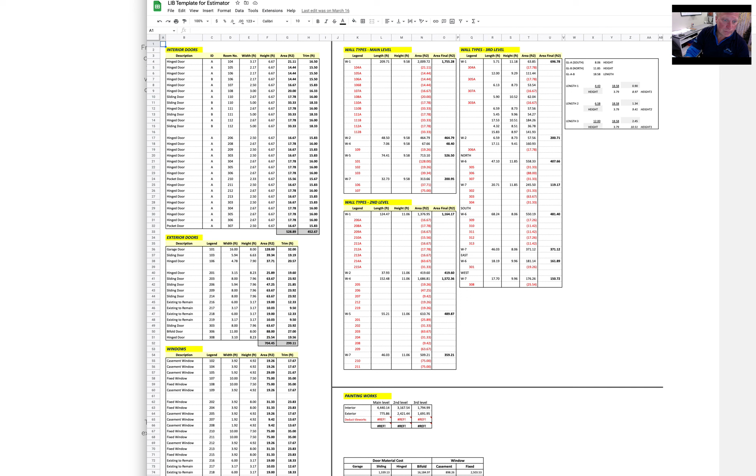We can do a break off that has all of the different estimates on size, space, units, volume. Then we get into walls, doors, amounts of units. Then we get into the line item budget. And this could be whichever project. This was an old project we did in Snowmass. You have the preliminary stuff that doesn't have anything to do with the site, but has everything to do with documentation and overhead. Then you have demolition, excavation, site work, landscaping, and so on. And this can be outlined in many different fashions. We ended up outlining it with 3,600 line items.

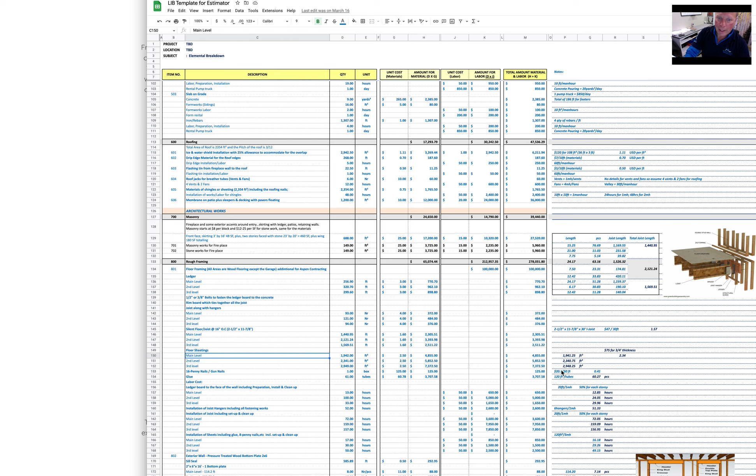For instance, here's rough framing. It's all the way down here at line item 800. Daryl, or whoever was working at the time, put some information over here in the notes with regards to what things cost, different dimensional planes, different costs of lumber, different takeoffs that have information with regards to whatever that line item was or is, and then going all the way through. So it has the quantity, unit cost, amount of the material, unit cost, amount for labor, and then total amount for both combined. And then to go all the way down, you'd have your total, right? So it's all broken down, excellent documentation. Daryl did an incredible job on this.

And then of course you could do an active budget, which we're doing right now on many projects that we do. We do an actual budget that we're actively updating. I'm actively updating daily or weekly. And then you have your subcontractor draw request. This actually documents the complete total for each line item, and then what's been billed out. So you get your percentage of completion as you go.

It's an active, or almost real-time, relation to what's going on. So that's everything with regards to the documentation and how we use the documentation.

Now let's get into something real simple. So we get into looking for estimates. Now, when we're looking for estimates, we first need to give them a scope of work. So here it is. I have Basalt, I have framing a loft, set rim and run 2x12 cut on top of walls with a cantilevered overhang that includes a 130-inch stair, 13 risers at 7 3/4 inch with a 10-inch tread. So this is framing a loft and a little stair, right? Onto a platform. Okay, so with that information, do I have enough info to give a bid?

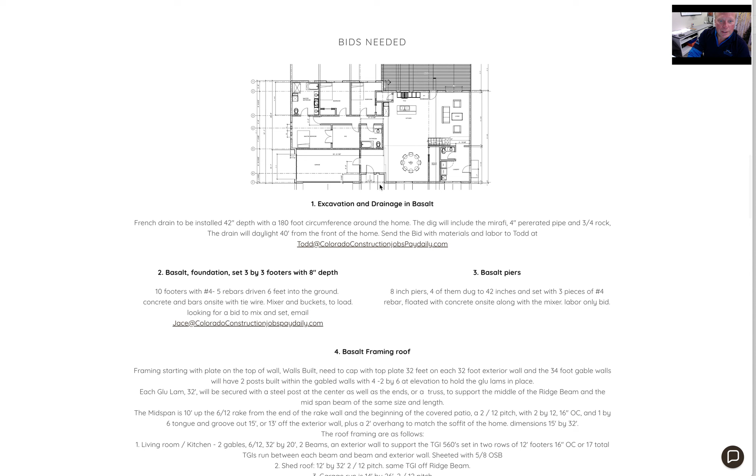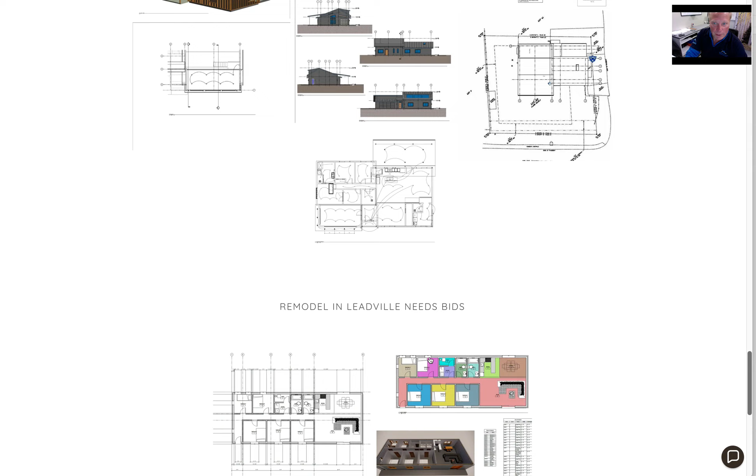Well, here's the layout. I don't have the loft there. Let me go down and see if it's down here. And there it is. So I have the loft outlined. Remodel in Leadville. There's the loft right there. So this is the loft. And there's the stair. So I know it's 16 feet by 32 feet, right? Because it has the 8 foot, 8 foot, and 16 foot, 32 foot. So how hard would that be to bid?

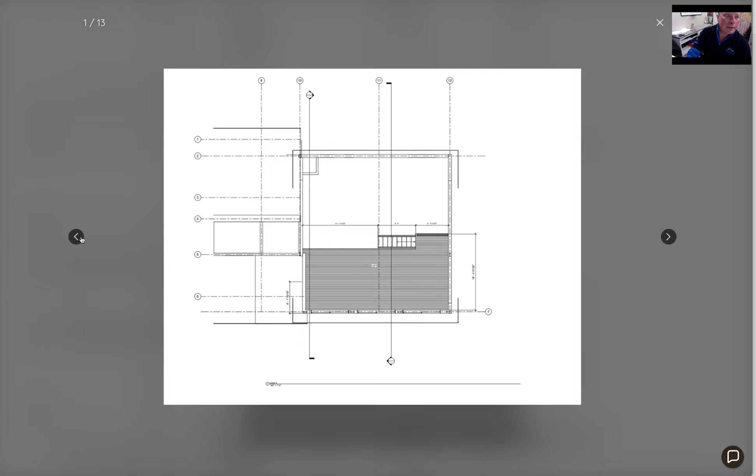Now let's go back up here. So I can go through there with electrical. And let's go back here and have framing. Framing a loft. Set the rim, okay. Run 2x12 on top of the walls with a cantilevered overhang. Rough sawn 6x12, okay. So someone could have given that bid real easy. It would have said, framing a loft, and then I would have had scope of work.

Install 2x12, rough cut, 16-inch on center. There would have been like 20, I think 25 of them. So that's $2,500, $100 to set each one. So that would have been $2,500. And then cantilevered overhang, 130-inch stair. The stair would have been $3,500. Standard price that I do for stairs. Cut from rough sawn.

Now to get a bid, for us, it's real easy. So we can go in here and do, let's say, Basalt foundation, 3x3 footers. You need 10 footers with number 4 and 5 rebar driven 6 feet into the ground. Mixer buckets load. Okay, so 3x3 footers, that's 9 square feet per footer, right? There's 10 of them. So it's a total of 90 square feet.

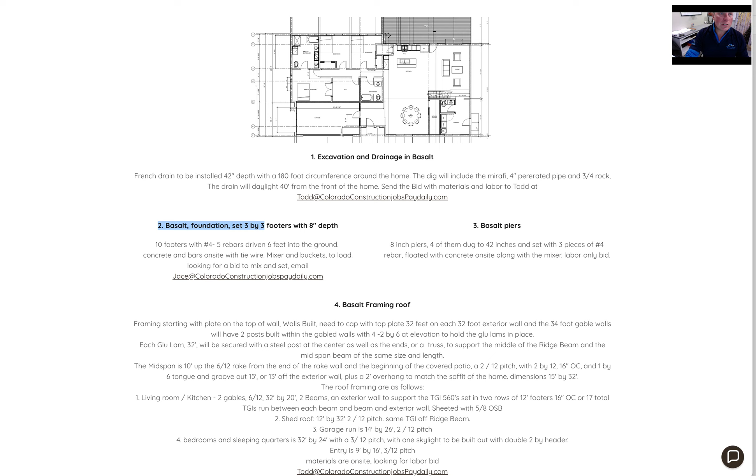Now, Fixr is a great place to find bids or estimates. Architectural, yes. Wood for the entire house. Continue. Put that down there. We're kind of looking at home or residence. Do I know? Okay, so that's Fixr. Let's see if they'll give us any numbers. Main. Alright, there you go. I can go there. Searching for pros in Carbondale, comparing quotes. Okay, so it's trying to find quotes.

Then you can go into here and go into how much does it cost to build a footer and pour concrete footers in Colorado. Okay, let's see what they come up with. So then you can come on down here. So here you go. Here is an average cost and prices. Cost of concrete in Colorado is $6.25 a square foot. That's 4-inch reinforced. We're doing a foundation, so that's double or triple that. That would be $12.50 to $18.75, right? That's the cost per square foot.

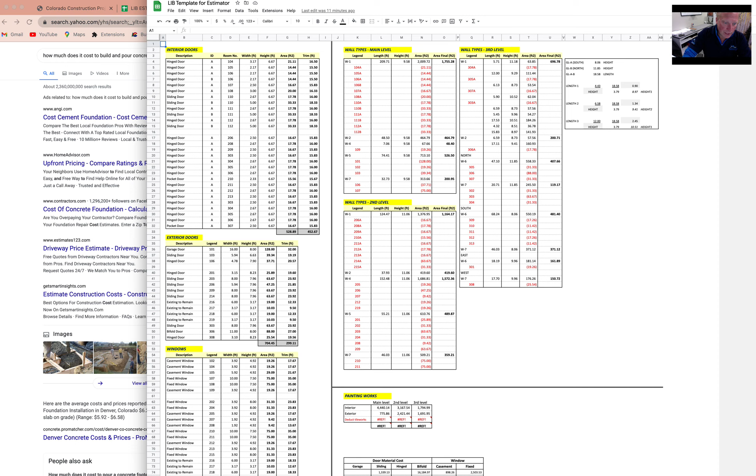You know now you went through what I'm sharing with you, this estimating folder. It has the renovation template, which is this template here, which has everything on it. It has the active one, the one you can manipulate and roll out, all the different wall estimates, units, volume, and then of course it has your Word document for estimating as our sample, has my sample, and there you go, that'll really do it. So all you really need is just that information, this basic scope of work, which I provide. You plug that in, you do your own estimates online, you request estimates from others.

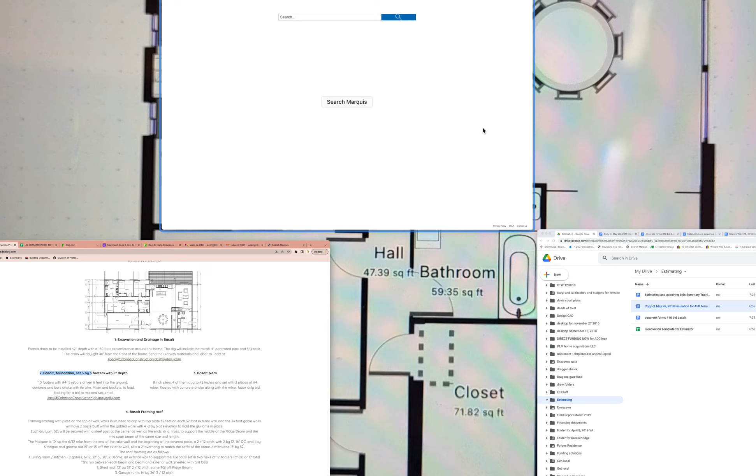And by the way, when I request estimates, it's real simple. I just say, if you'd like, please go to this website. Well, I'll do that in another email, but it's just, please go to our website, coloradoneedsbids.com. And here's an example of one of our bids. We have a guy doing that. Here's the bid. He estimated concrete, don't show him this, at $20 a square foot, and that's what he does. Labor only, materials are extra, and this is his bid, $1,800 for 10.

Oh no, that doesn't work. Remember we said 500 per footer, so it would have been 5,000. Sorry, I got distracted, but we want to be good on that. $20 per square foot was too low because it was concrete only. Plus, you have to build the form. So what we did is we doubled it. We said 180 to build the form, 180 to pour the concrete. That's 360. Round up to 500. That sounds more feasible. So the total was 5,000.

Okay. And then I go back to, of course, checking my numbers and seeing how much things cost. You go in here and people ask, how much do concrete footers cost? People are saying thousands, right? It's 2,000 to 3,000 for this project. So it looks like we need to ramp it up. 1,750 for 5 footings, so that means 3,500 for 10 footings, right? So 3,500 to 5,000 would be right in there. We want to err on the side of caution, so we did 5,000, and there you go.